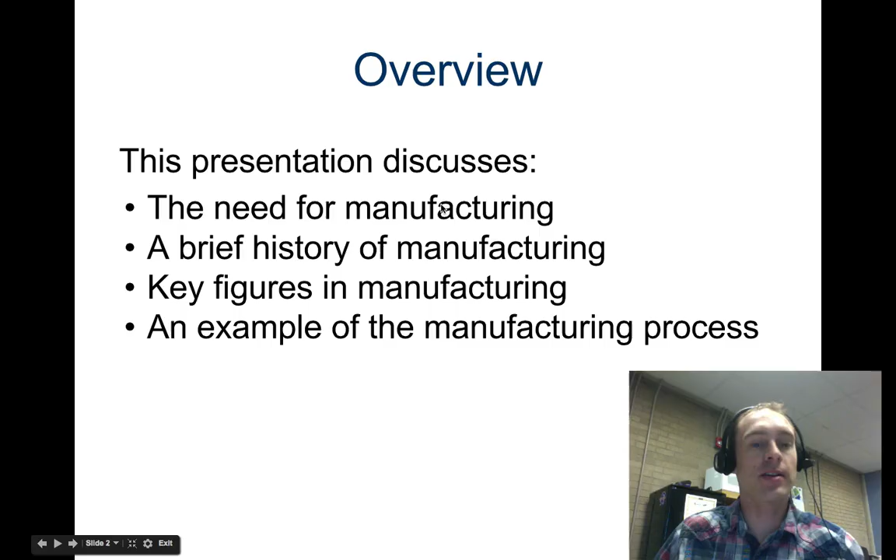Welcome to your presentation on history of manufacturing. What we're going to look at today is the need for manufacturing, history of manufacturing, key figures, and examples of the process. So let's take a look at why manufacturing.

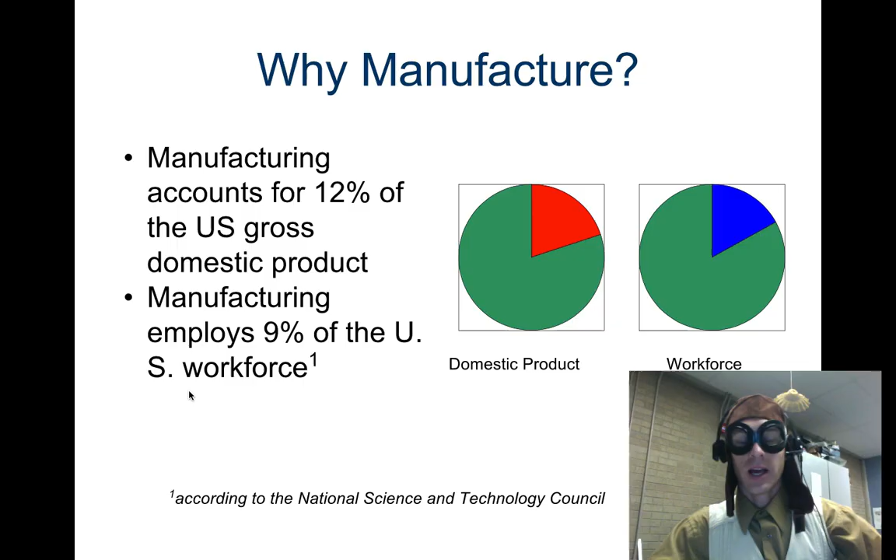I believe this is probably one of the first questions in your note sheet: the need for manufacturing. It accounts for 12% of the U.S. gross domestic product and employs 9% of the U.S. workforce, which is about 1 out of 10. So it's a pretty significant part of our workforce.

Manufacturing started out originally prior to the 19th century when things were made. It was always made by artisans, and artisans are just people skilled in a particular field. You can see this guy here chiseling some stuff out with a wooden tool, and everything is handmade. Everything is slightly different right now.

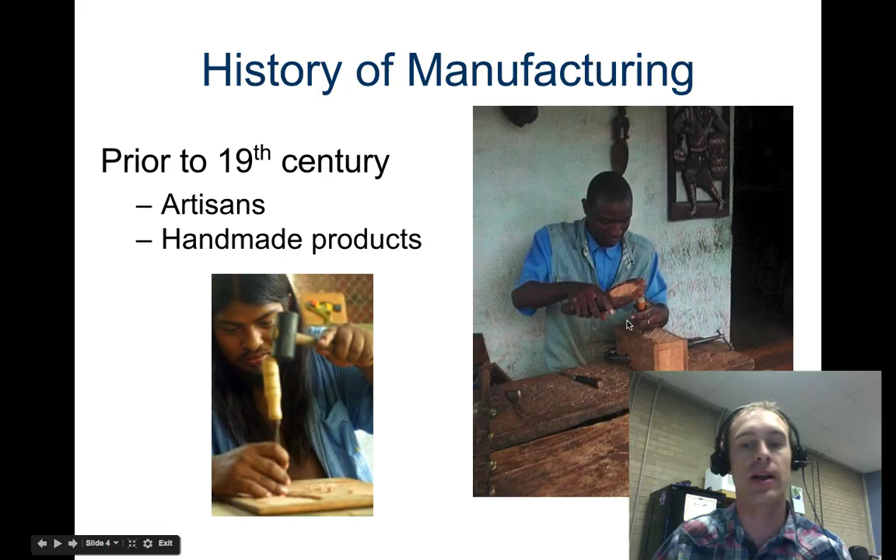People start to pay a lot more for handmade things because everything is being mass produced. But things can be produced a lot quicker now with mass production and manufacturing. So being an artisan is more of a hobby and a craft for at least much of the United States.

Prior to the 19th century, Eli Whitney was really one of the innovators or initiators of the history of manufacturing, and he was most famous for this thingy here, which is the cotton gin, that's right.

But he went bankrupt because he was a bad businessman. So he left the South, went to the North, and took on the project of mass producing muskets, which led to the invention of the milling machine, which is right here.

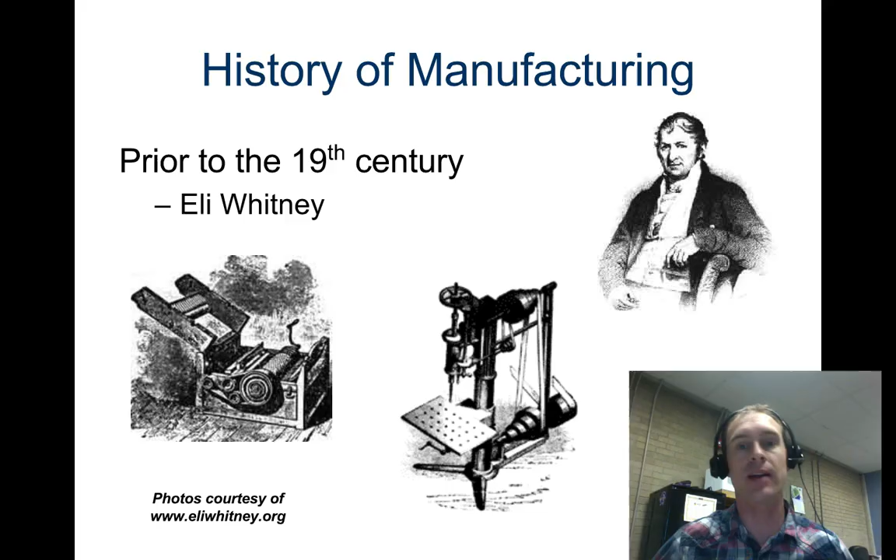Many of you have watched a video about how Lego even used milling machines last year. He quickly realized he had to break down this process of mass production into really small parts, and came up with the idea of interchangeable parts. He'd make many of one type of piece, and if that broke, you could swap it out with something else. So one of his big ideas was interchangeable parts.

Then we get to the early 1900s with Henry Ford, who revolutionized manufacturing with the introduction of the assembly line. You can see these people assembling. The idea was that if the assembly process was broken down into small steps, anybody could do it. So they hired anybody, since the steps were small enough that really anybody could do them. It was dangerous, though, since they didn't really have safety practices because this was all brand new.

In 1911, this kind of started in 1908, but in 1911, 200 fingers were severed in that year alone. Just a little tidbit for you. But the workforce was happy because he more than doubled the daily wage from $2.25 per day to $5 per day. So they figured, who needs 10 fingers, right?

They made so many, about 8,000 per day, that the cost of them was down to $300. So even the workers, working for a couple years after paying expenses and living expenses, could afford their own, which was pretty remarkable.

Henry Ford was also responsible for the first death by a robot. So he was the first Terminator, and it was when a worker was hit in the head by a robotic arm. Anyway, that wasn't actually Henry Ford himself, it was Ford Motor, and that happened in 1979. So that was much, much later.

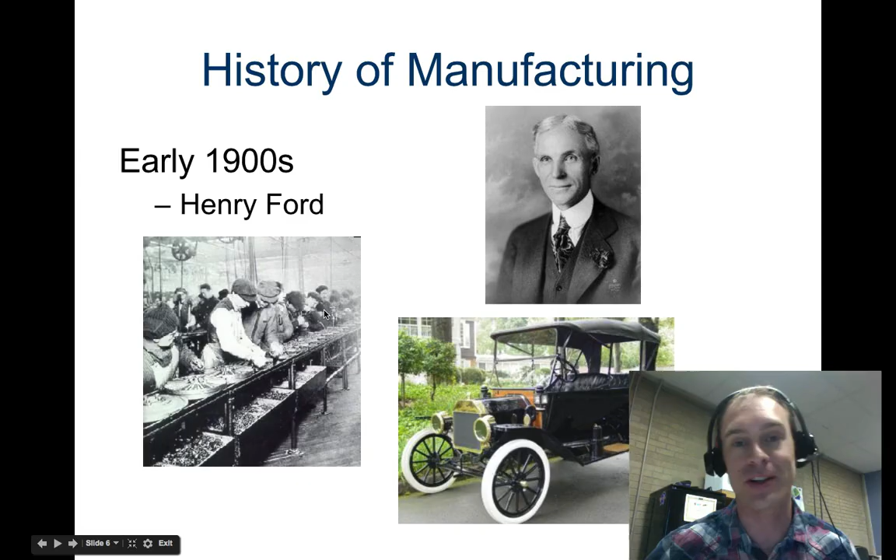If you're interested in other Model T facts, you can check out this presentation on the bottom of the notes. It was 20 horsepower, went about 45 miles per hour. And interestingly enough, it got about 13 to 21 miles per gallon, which is pretty much how modern trucks of today are. So let's continue on into the early 1900s.

Kiichiro Toyoda introduced lean manufacturing and just-in-time manufacturing. Just-in-time manufacturing, which we're going to get to, means that all the parts arrive just when you need them, so you don't need to have warehouses full of stuff.

If you're going to build a toilet, you don't have a warehouse full of little flushing handles. A truck delivers them all the day that you're building them. So if you're going to manufacture 2,000 toilets, or 200 toilets in a day, then the truck comes that morning with 200 levers, and you just use them all up.

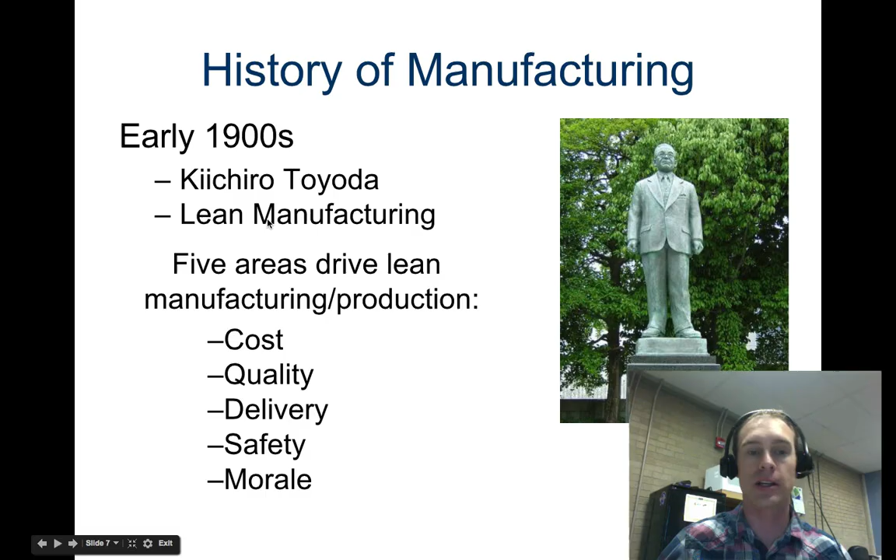That's just-in-time manufacturing. He also introduced the idea of Kaizen, which just means good change. It's the idea of continuous improvement, always looking at what we can improve, how we can innovate, how we can make things better and better. That's a lot about lean manufacturing, which we'll look at here in a bit.

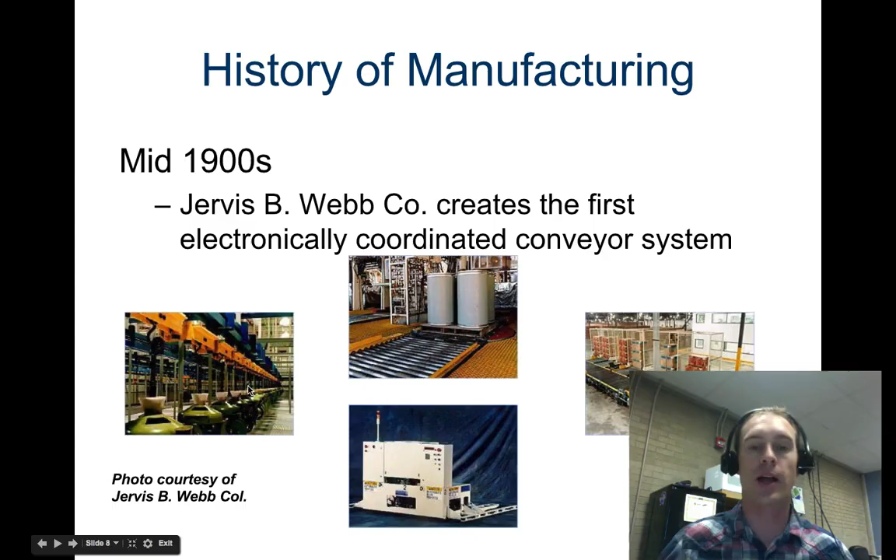In the mid-1900s, the Jervis B. Webb Company created the first coordinated conveyor system, and they continue to work in conveyor systems even today, offering a lot of variety. So you're going to get to work with a lot of conveyor systems with Vex Robotics, or you already have probably.

Think of an automated library, where you have a computer that picks up the book and delivers it to the person. You check it in, it reads the barcode, and it knows exactly where that book needs to go. So you have an automated library system. These exist. Same thing with data, where you have an automated data system that goes and grabs the data file, maybe a bank of CDs or a hard drive bank for large companies doing data storage and retrieval.

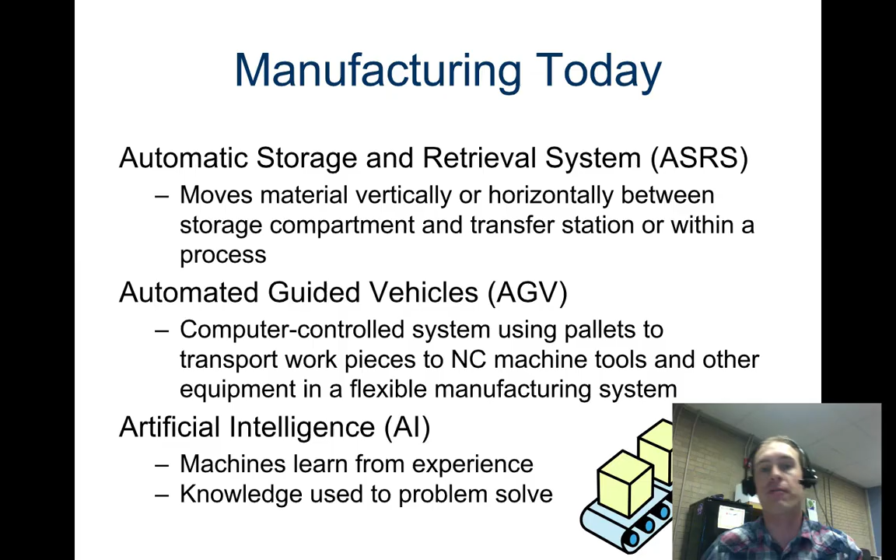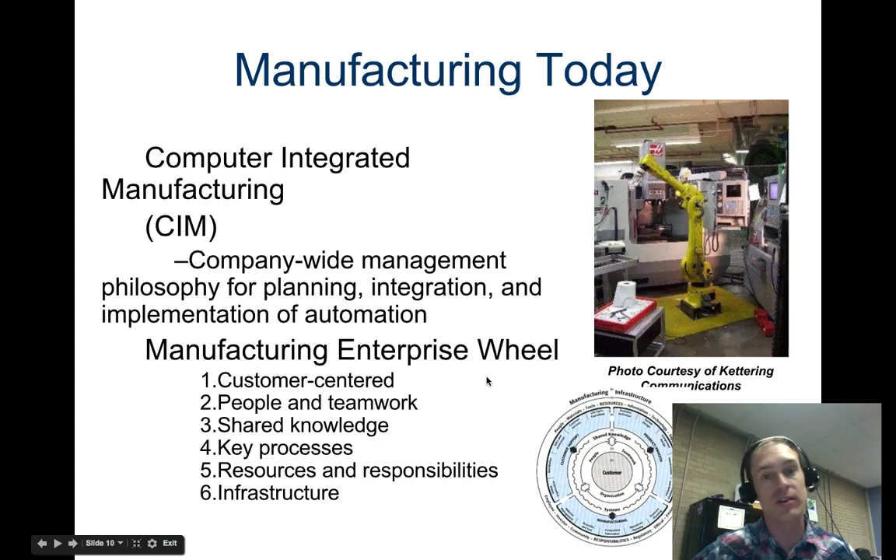There's one main idea, and that's at the very center of this wheel. If you are full screen watching this, you can read it now, and that is the most important piece. It really started in the 1980s, so 30 years ago in the history of how things have been manufactured—really not that long ago.

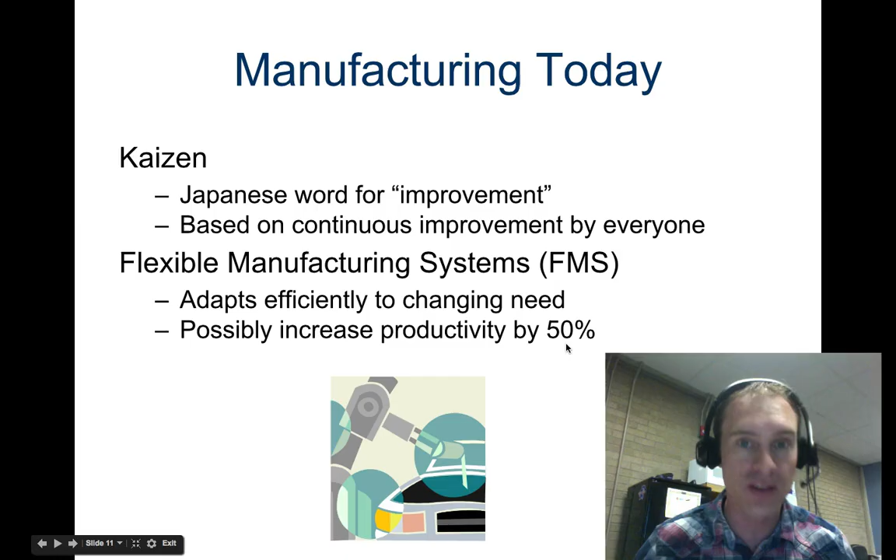But let's say you have an item that needs to be painted. Maybe you need 3,000 of them that are red, so they're painted red, and the code is counting. Once 3,000 hits, we have a different color that we spray them with. That is flexible manufacturing, and it can increase productivity by a lot, up to 50%, because you don't have to stop the line. A person doesn't have to be involved, it's just counting units where it makes its change.

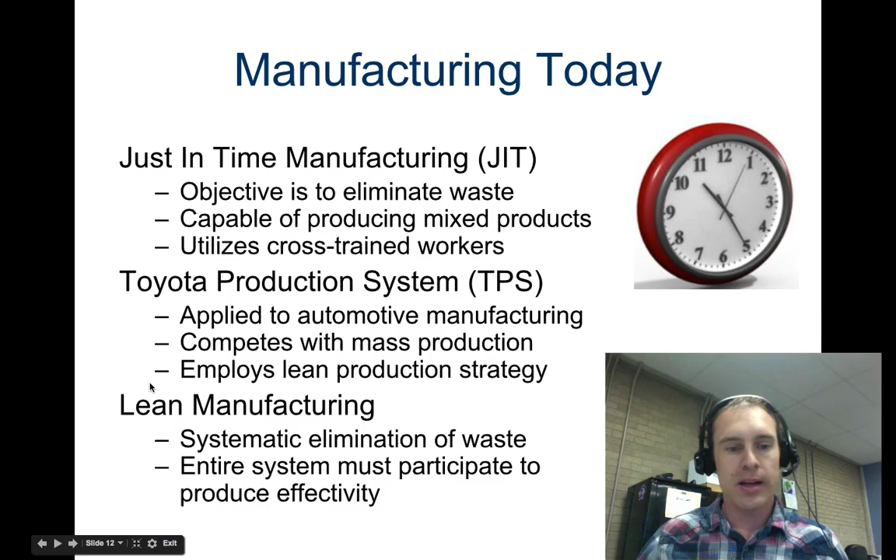So again, I think we just covered the core philosophy of lean manufacturing. That's kind of right in here.

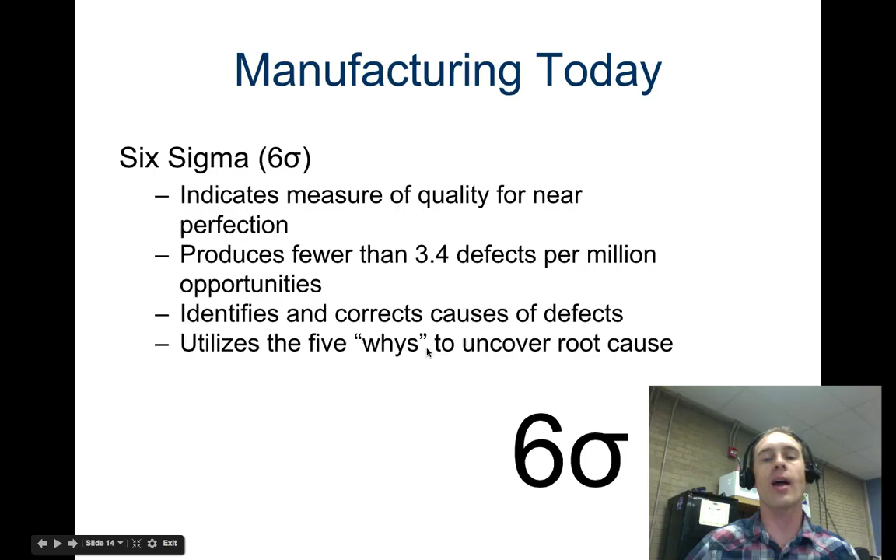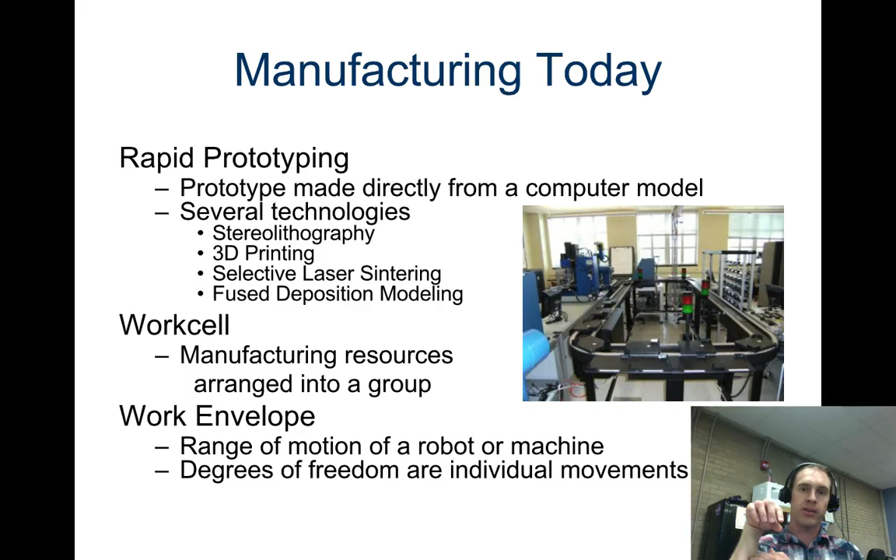The robotic arm that we have in the milling room is the same thing. It has a range of motion. How far can it reach? Where can it place objects? It can't continue to move back forever, just like my arm can't, because it kinks on itself. So there is a work envelope, and that bell signifies we are done.